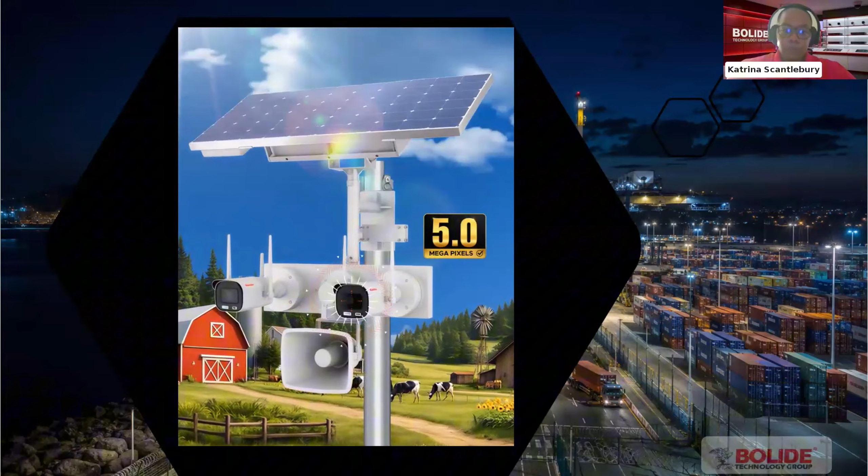Security evolves into a new era of intelligent autonomy. Introducing the Intelligent Solar Camera from Bolide Technology Group. Capture every detail with high-definition imaging and maximum precision monitoring.

2K technology designed to deliver superior clarity in any environment. Continuous protection day and night with advanced night vision. Built-in 4G connectivity for real-time remote surveillance from anywhere. Integrated smart analytics for precise detection and immediate response.

An AI-driven solution to protect critical environments. Autonomous operation thanks to its high-efficiency solar charging system. Designed for fast, flexible, and completely standalone installation.

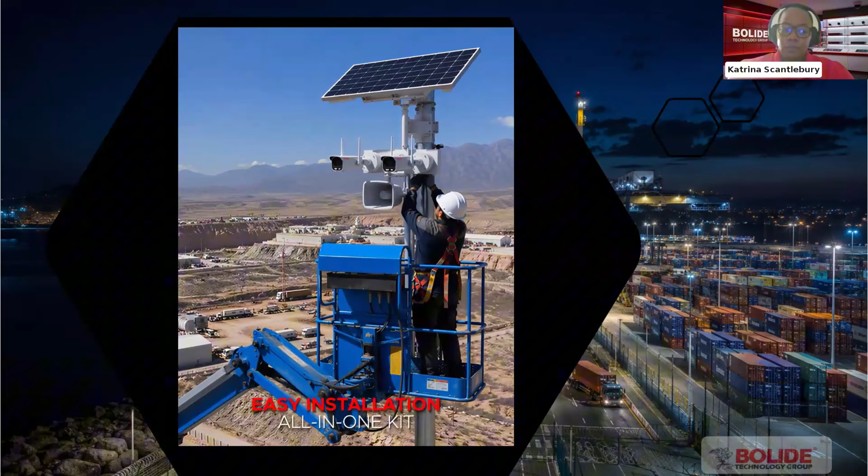Ideal for remote areas, agriculture, construction, mining, and critical infrastructure. Maximum performance even in the most demanding environments. Bolide Technology Group: intelligence that protects the present and designs the future of security.

Additionally, along with the cameras we've selected for the port, we also have a video doorbell that has an access control component we can leverage. It supports facial recognition and has an RFID reader, so your traditional RFID business cards can work with the reader.

It has a call button, so if you need to speak to reception or security as a visitor, you can push that button and get assistance. It also has remote opening, so if we need to remotely open or trigger a door or any type of access control, we can do that.

It has I/O and WAN output, so we can connect different devices to the doorbell as well, such as your maglock or request-to-exit switch. We also have the ability to support two-way authentication: facial recognition plus RFID.

So it's two-step authentication on this unit, with facial recognition and also your badge. As we know, with traditional RFID cards, sometimes an employee may come to work and forget their card, or maybe want to borrow a coworker's card to enter an area they're not supposed to enter. Now with advances in security, we can leverage that two-step authentication.

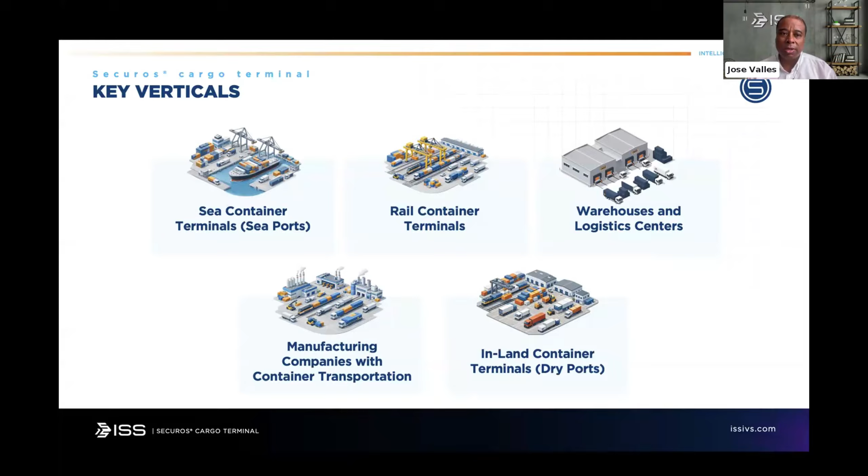So what does SecurOS Cargo Terminal cover? We cover key verticals: sea containers, rail containers, warehouse and logistics centers, manufacturing, container transportation, inland container terminals or dry ports, as you mentioned. This is what we're going to see, how it works.

We don't just sell a product or a license, we try to sell value, make a differentiation. At the end, what we're looking at, we don't see it as a cost, you can see it as an investment. You can see the ROI - if I invest this amount of money, or the customer makes this investment, how long will it take to return this money?

It's a business word, actually. Unfortunately, for many companies or CFOs, they see security as an expense. But if we dive deeper into our solution, you'll notice we focus on giving value and return on investment. So I don't say, oh, I acquired this solution from Bolide and ISS, and this is an expense. No, this is a real value solution working together to make your port more efficient, save you money, and even make more money.

At the end, you're going to see how this translates into a benefit for your customer - either a port, a logistic hub, dry ports, or a logistic center. They can see how this enhances their operation. Unfortunately too, for many they say, oh, I had to reduce human power. Katrina mentioned a good point about how we automate the system to reduce costs, since security guard costs are high. The intention is you have a single point of entry, with even double or triple validation based on the customer's requirement, and we make sure things happen.

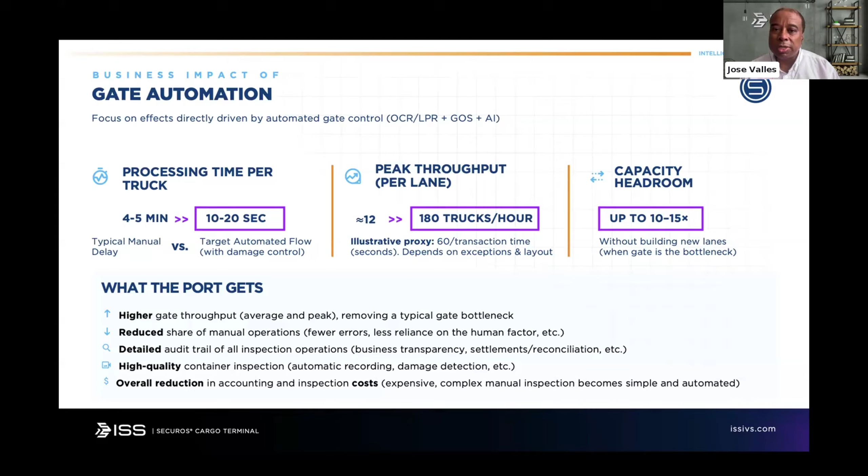So this is how we make this automation happen. You have automatic control on container reading, license plate recognition, gate operation system, together with artificial intelligence.

And here is a redesign, how we did before. So in the entrance gate, in the manual part, you have the truck arrival, then you have manual documents you have to check, right? So you have a mismatch resolution window while you have trucks in the back waiting.

This also causes congestion in the port. So you have manual exterior checking, somebody's up with a board trying to check what happened here, calling somebody to answer. All this can be reduced.

And then they go to the release. Okay, everything is okay, we fix what happened, you may enter. So this typically takes 4 to 5 minutes.

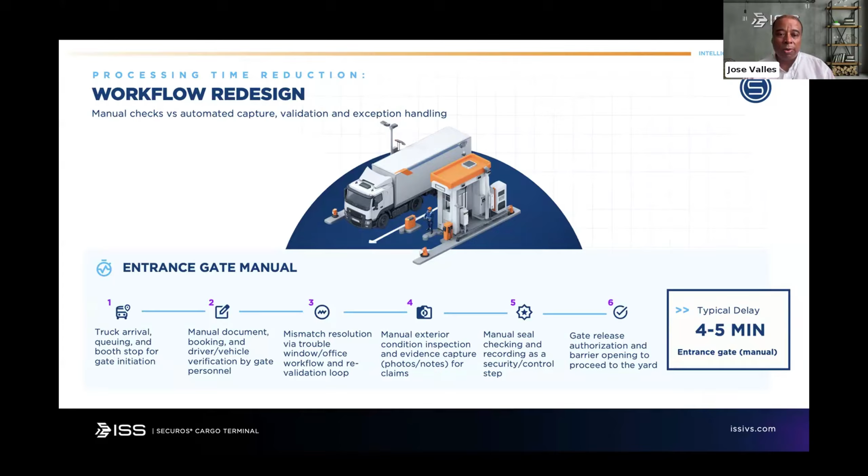And you can count, you have 20 trucks, 50 trucks in the lane. So 5 minutes times 20 trucks, well, you have 100 minutes. So this can be almost 2 hours. So this is a way we can count on this.

Now, if we do the workflow redesign here with our SecurOS Cargo Terminal, we have pre-advised register transaction. So it's a validation to the terminal operation system, integration between, and it passes through the automated container marking recognition and transaction, so it's a single pull. It's automated seal presence, so you can see the seal is in the back.

And then you have anomaly marking without manual checks. So everything is done through AI, the integration with the cameras. And then you have the automated condition, and it's time-stamped evidence with video. So it's not just that you have video, it shows everything was fine.

And then you have an exception when somebody enters and a release. So as you can see, this is the process, and we moved from 4 to 5 minutes to 10 to 20 seconds.

And this is even including the automated container damage. As mentioned at the beginning of this webinar, this costs an average of $7.2 billion in cost.

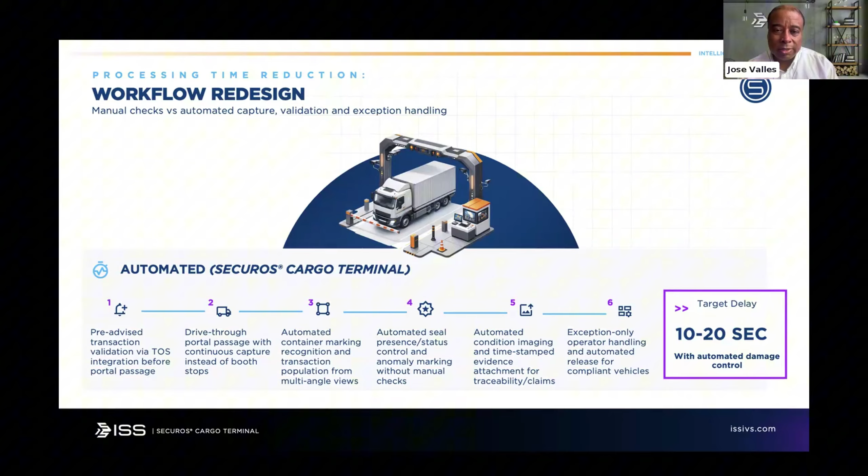But if someone complains against us, we have this: this is what happened, this is the hour, this is how they entered, and this is the stamp.

Here is the evidence, so you can go on reducing all this event and paperwork and headcounts, other people just checking back and forth. And once again, going from manual posts to exception management.

Staff shifts to security events and claims. You have human factor, and you have a scale with traffic without linear hiring. So everything you already have, you can have control of whether somebody already entered or has the request to deliver the container. You have already planned, so everything is checked, double-checked.

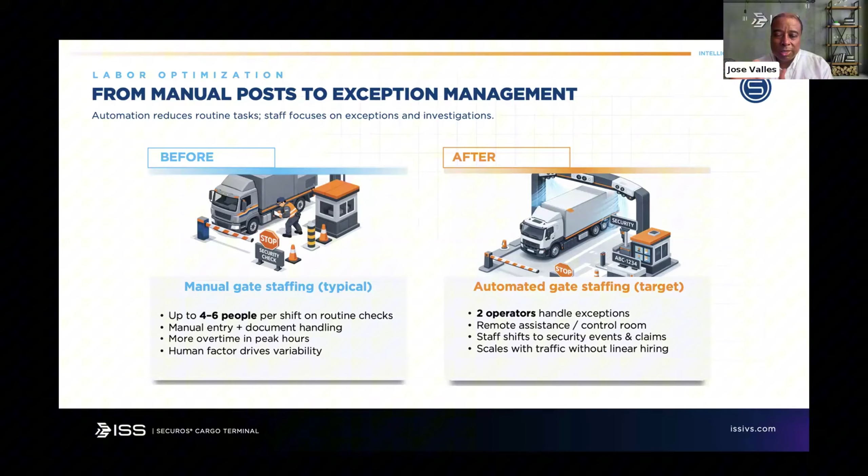So when they enter or go through, that's why we had the capacity to reduce it in such a short time. And once again, reducing errors happens. We have evidence, and you have OCR accuracy between 98 to 99%.

Plate recognition also runs 98 to 99%. And you have manual correction, so between 1 to 2% maximum. So this is also part of the system.

So we will have evidence, high resolution, time-stamped. You have damage claims, reduced disputes, improved auditability, and speed of investigation. Once again, I've seen cases of 1 week, 2 days, 3 days, with no evidence.

And these words of evidence show, guys, this is not our problem, this problem arrived through the ports. So here's the evidence, no discussion, nothing happened, no waste of time.

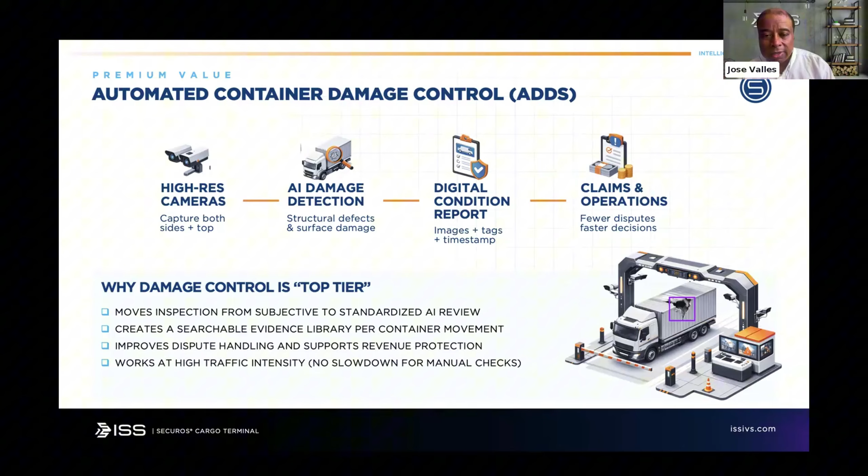I'll stop here for a moment - we have KPIs, key performance indicators. So the customer can say, okay, I want to check, review, trace, track how we're doing with our KPIs. For example, how many containers enter with damage? We can check this now that we've automated it. So this report can be shown to the board, the operations part, showing how they're improving efficiency and reducing costs they previously had to absorb.

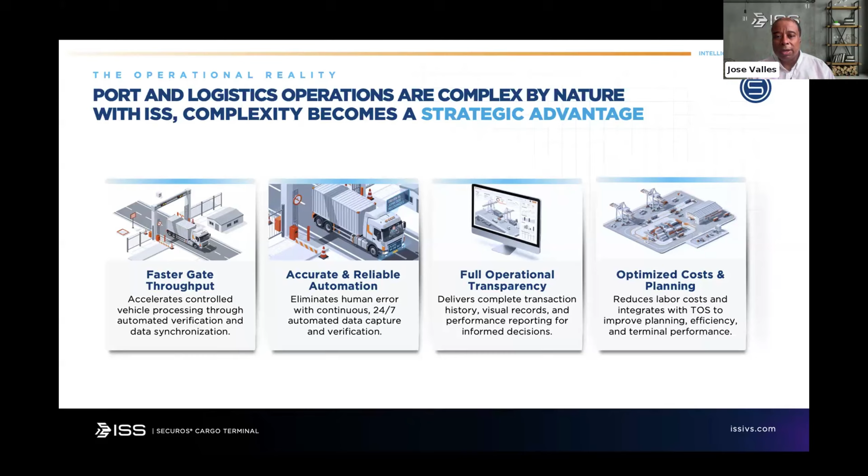This goes to the next point - optimizing costs and planning, reducing labor costs, integrated with the terminal operation system, the TOS. You can improve planning, efficiency, and performance, which is what ports are always looking at. If I need to ship something, I'd rather go to a port with less than 24 hours wait instead of 72 hours or more because of manual processes. This also means more cost for the customer. But if the port is more efficient, this cost reduction gets passed to the end user, who will prefer shipping through that port because their cost is lower. So it's a cost reduction on both sides that enhances the port's business.

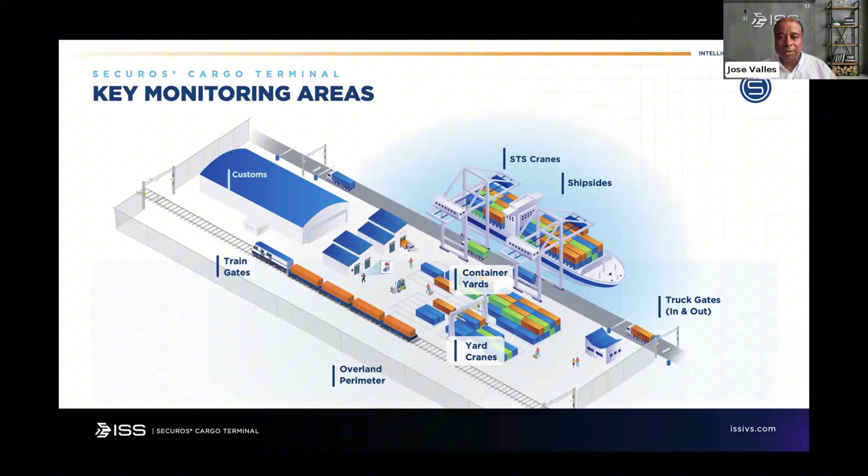So here's a cargo terminal, with a structure using visual markers, so you can trace which containers are getting to the terminal. It's automated control points with an LPR system, including license plate recognition, cargo tracking, and UVSS.

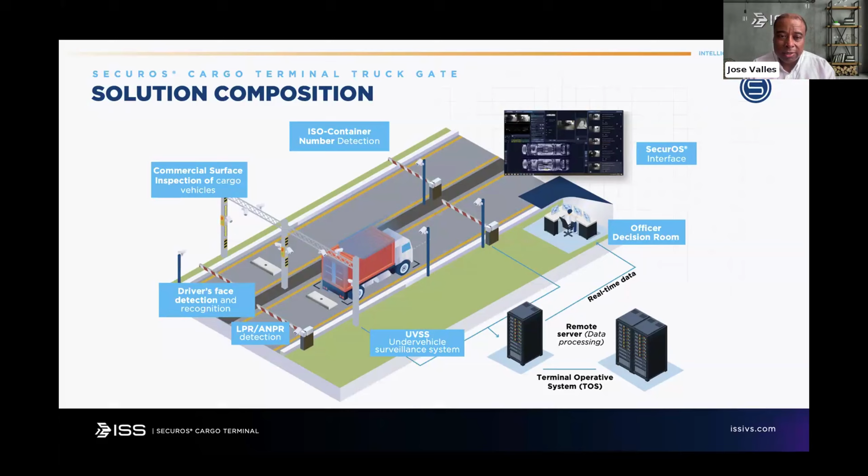You can check all over something at the terminal when something is entering wrong. Actually, in Brazil, they have found in the ports a lot of things that could be under the truck or under the container whenever they want to exit or enter the port. So this is a way to enhance security and give more safety to the operations.

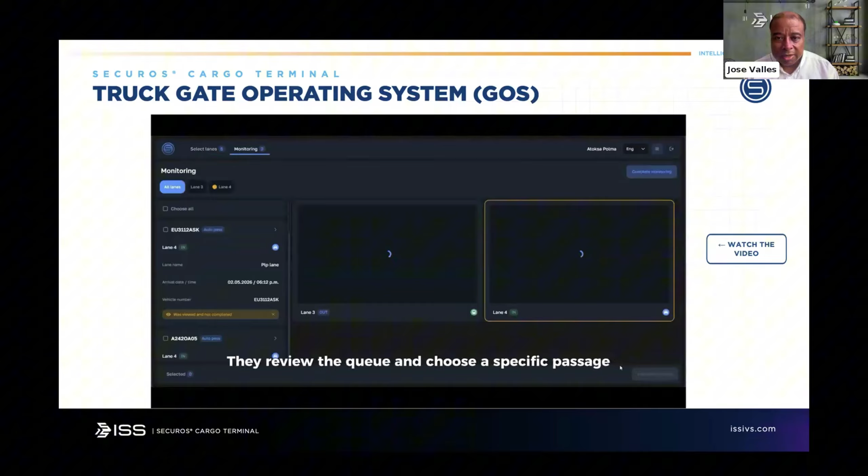Here is how the containers are displayed. You can see it also on the receipt. This is how you enter, right? You log into the operator, you select either the lanes to monitor, what you want to monitor, and once you start it, you will see what happens.

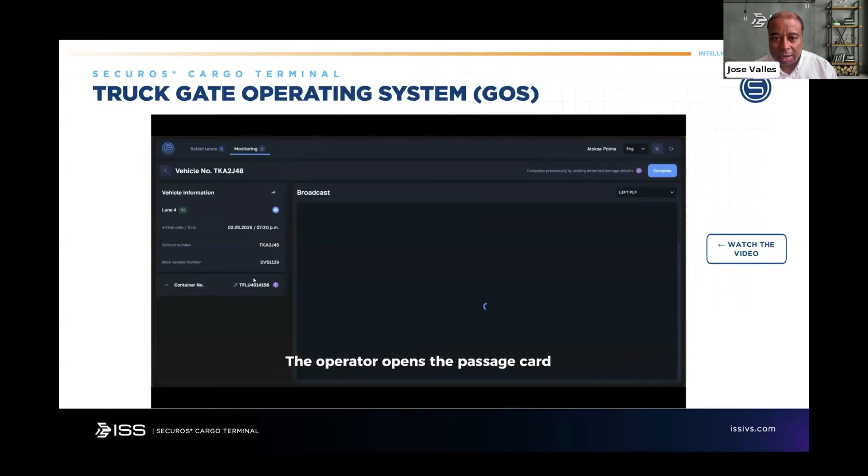So you can trace, and once again, if something happened, you will get the report right away. See here, it's a vehicle license plate image. Everything can be checked beforehand. So it's a very short way you can see how to make it happen.

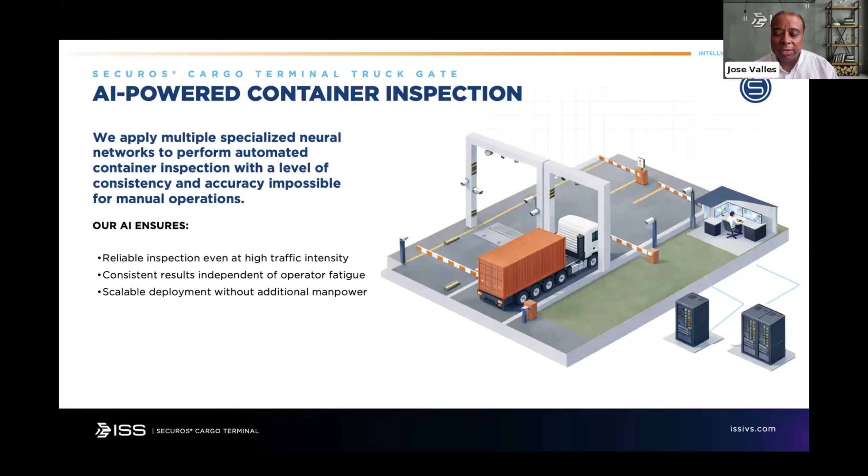As you've seen, how the tracking is done, it's live.

Here's another mention of the automated damage detection system. As you can see, the system can easily detect any type of damage, from structural deformation, dents, holes, surface damage, to integrity violations. So you have early detection, dispute prevention, and data reporting to the shipping agency or the customer, whoever enters the point to be delivered.

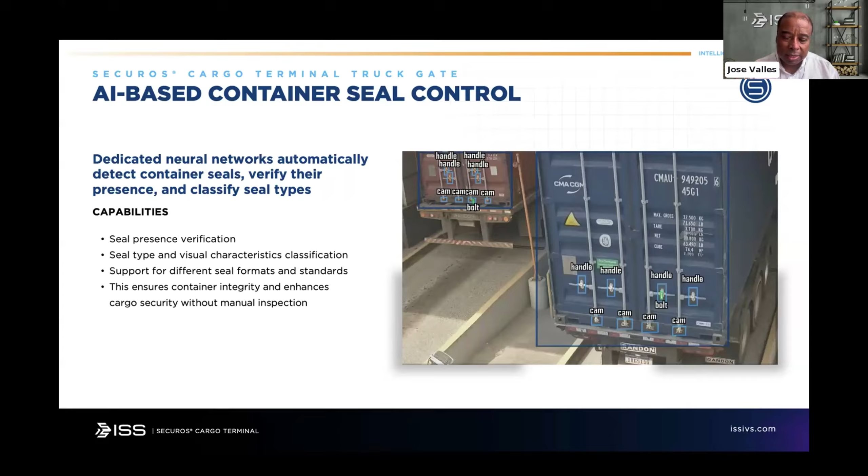The intention is to ensure the container integrity. When they exit the port, the container was sealed, so why did it arrive without that seal? We make sure that this seal was on, and we have a reporting part that confirms and serves as evidence that this seal was on whenever that container left the port.

So here's another video on how it works, the seal control. You can see what the camera can identify, pass over, and confirm how this truck and container leave the port.

Very fast process, not very hectic. It makes it easy.

The marking here also - gross weight, maximum gross, the net cubic meter here, all that information is also part of the report. Payload, warning labels, any warning labels, and any additional markings - it's already extracted directly from the container.

So you can have the manual part, and you also have the video part that needs to be complemented, and you can verify that, but actually both pieces of information should be the same - there shouldn't be any difference whenever either entering or exiting the reports.

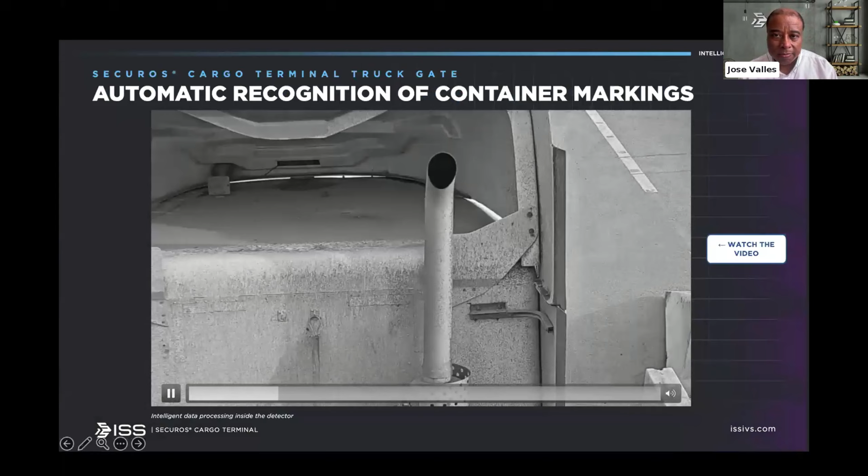Here's detection and marking too, how it happened.

So what we have optional, once again, is the UVSS. It's a cost-effective solution for visual inspection under the vehicle.

So you can trace under the vehicle what happened, right? You can relate it to the plate recognition, and whenever you inspect, it's actually in one report, as you can see at the top here. So on the vehicle, you have the front, the back, and what's underneath. And you can also have it transmitted to the terminal operation system.

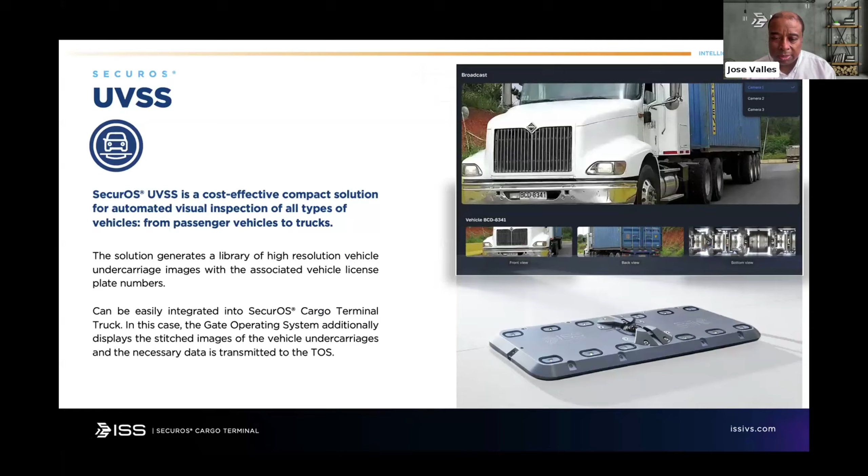Once again, FaceX, the face recognition, with security you can check the face and truck information - everything should match. If you're going to send somebody to deliver a truck, that person will be the same, because I'm going to pre-register this guy into the system, and when everything is fine, the gate will say okay, you are already authorized, get in. Truck information, LPR on the vehicle, everything is okay, fine, enter.

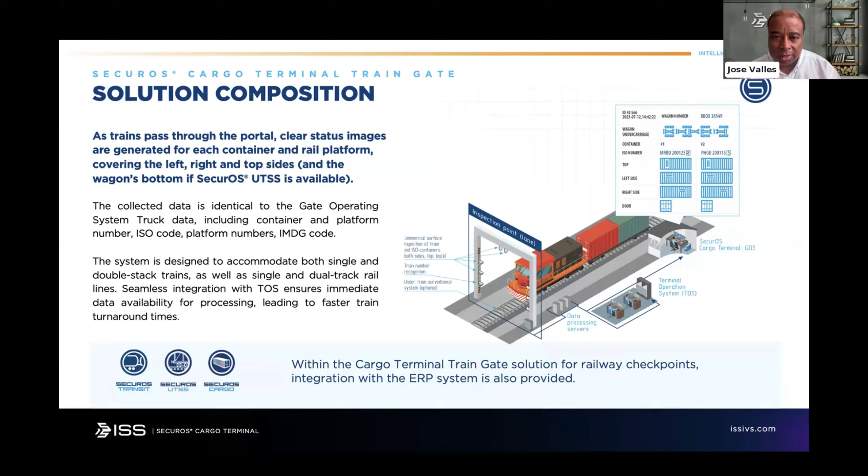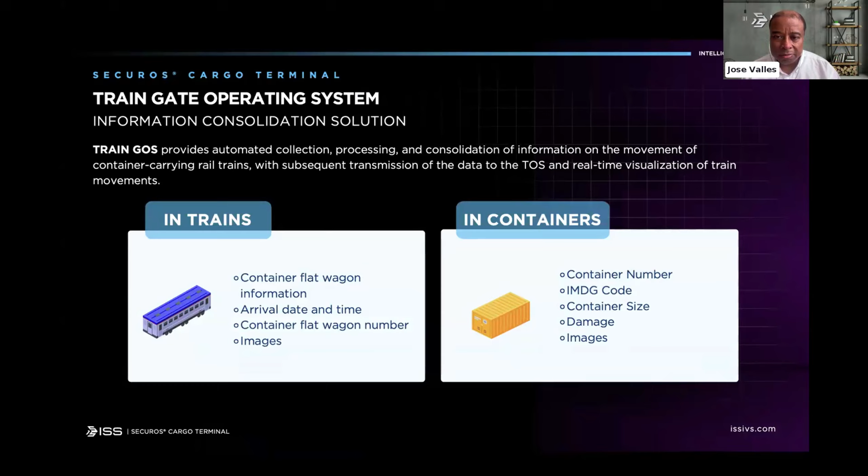This is a train too, similar - a composition, how it works. There's not a lot of trains in the Caribbean, but this can also be done. Doing the same - the train operation system, the gate operating system, the wagon, the arrival time, the number, the container size, damage, image - similar, but focused on trains.

The train too is very brief, similar. The platform is easy, very user friendly, can be done easily.

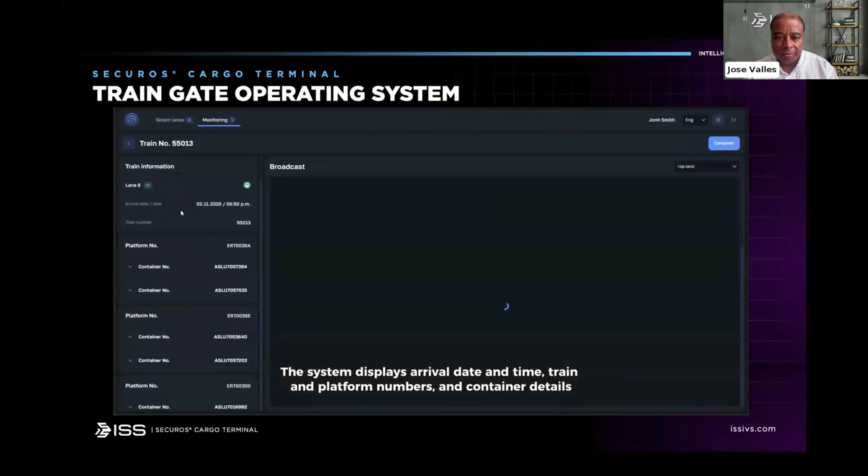Information of arrival, date, time, how many platform numbers, details - information similar to containers, but also can be done.

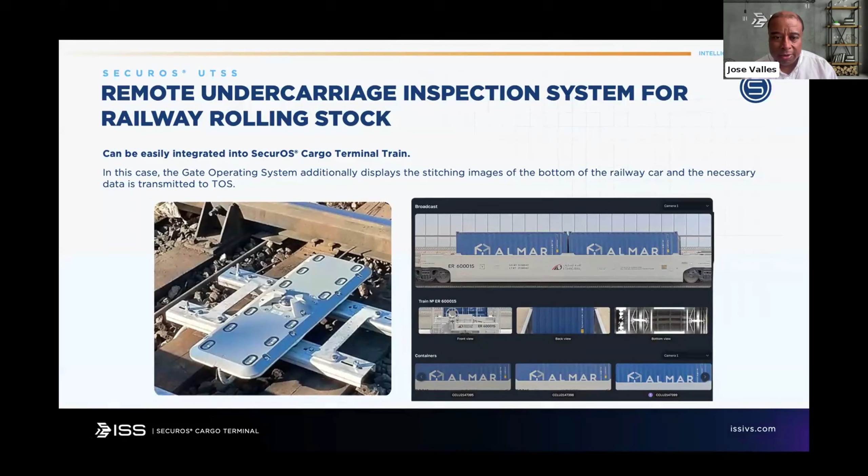Here's another way, the inspection similar to the UVSS, but this is focused on train - it can also be done for trains. And some success cases too, it can be done, in the Middle East, for train reports, how we do it.

So this is what we have done before, already implemented, and we are open to listen to requirements needed, work together again with our engineering teams. And one key point here for us is that all proof of concept can be done.

Because it's not just showing videos and so on, whenever there's a potential project, we have the capacity to deploy an engineering team to any area of the Caribbean, and we can do a proof of concept, so the customer can test, they can see the reality before they do any purchase.